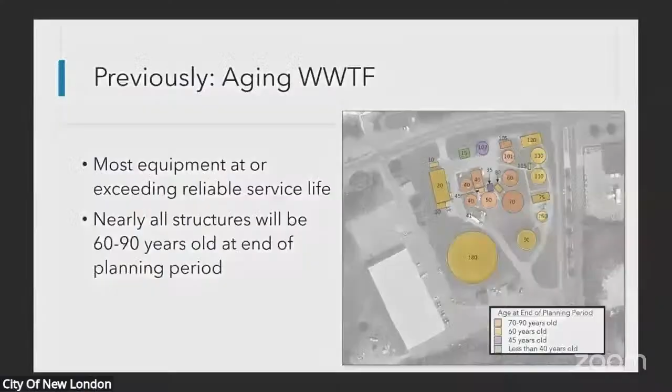Other thing that we've talked about before, first and foremost, was that phosphorus limit. But we also talked about the age of your facility. And some of you, quite a few of you, actually toured the facility and have been out there. I think Ben and Robert have been talking about the age of the facility even before this project started. But I think it's important to remind everybody that you have an aging facility. Much of the equipment there is at or exceeding or certainly fast approaching its reliable service life.

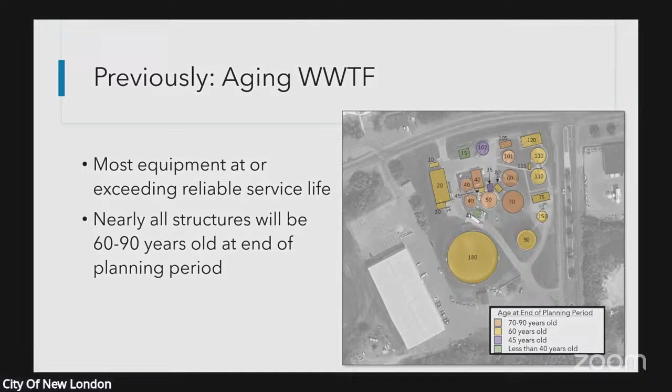And the plant's been there a while. The department, EPA, everybody, at a time like this makes you plan 20 years in the future. At that 20-year planning period, almost all those structures will be between 60 and 90 years old. So you have an aging facility. And then something else we've talked about before, you have one of the most complex facilities in the state.

What we're showing is a schematic of your plant. What is in blue is your liquid train. What's in brown is your solids train. In other words, when you clean the water, you generate solids, and those are processed by those brown unit processes on the bottom of the schematic. You can see there's a lot of circles and squares, and there's just a lot of unit processes here. There's a lot of complexity here. There's a lot of old complexity here.

And I think one of the things that's important to consider, we've talked about it before, is that this plant and the way it's configured, where you have a rock trickling filter, a plastic media trickling filter, and then activated sludge, you pump it 3 times. If we just dropped in another technology to meet the phosphorus limit, you'd have to pump it 4 times. But this type of treatment plant, where you've got those trickling filters in advance of activated sludge, is counterproductive to efficient phosphorus removal.

And someday you'll have a nitrogen limit. It's counterproductive to phosphorus and nitrogen removal because those trickling filters consume all the carbon, and the carbon is the fuel that drives your biological nutrient removal. So you have an aging facility, but a complex facility that's really configured for an era, a service area that probably isn't ever coming back.

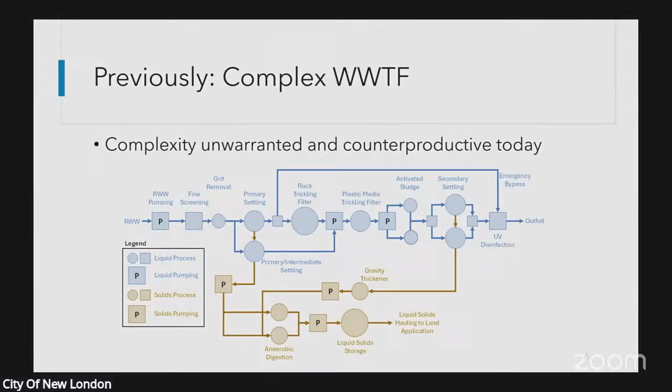I mentioned at the onset that there's some news to report about the MDV. There's really 2 practical compliance strategies to meet this phosphorus limit. And one is the MDV, a multi-discharger variance. At the previous meetings and when we did the previous study, there were rumors that the MDV was going to be extended, but it wasn't extended until more recently. So when we talked about the MDV before, it was set to expire in 2027. That's been extended, and I'll talk about that.

The way the MDV works is you essentially buy your way to compliance until the MDV expires. So you pay for each pound of phosphorus that you need, and you buy your way to compliance, and that buys you time. But MDV is a variance. That's a key word. Variances aren't forever. Variances are for a short, defined period of time. It was only an option until 2027 every time we've talked about this in the past. It's an option today for a longer period of time. We'll come back to that.

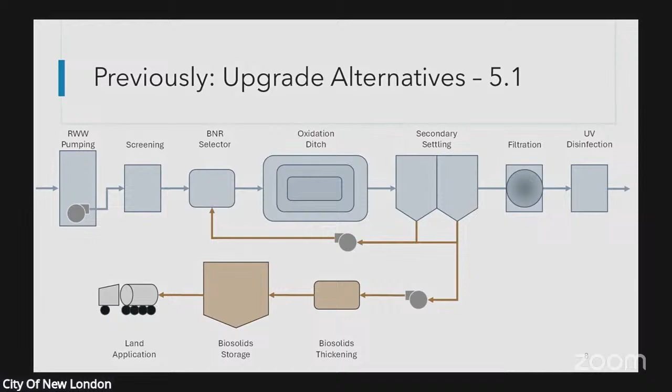The other alternative that we talked about is the same liquid train. All the blue boxes on the top are the same, but on the bottom, we would thicken the solids up, store them temporarily. Then we would squeeze the water out of those solids, put it in a heat dryer. So we would get those solids to like 90% and effectively produce, and I use this analogy, it wouldn't be exactly the same, but it'd be very, very similar to Milorganite. You can buy a bag of Milorganite at Home Depot or Menards or something. Some of us have put it on our lawns.

You'd make biosolids pellets that, at that point, after the drying process, are Class A material and they're effectively unregulated, and they could be distributed to local landowners. And so, because of all the logistical issues and the future of land application of Class B solids, we're seeing a huge proliferation in dryers. And there's quite a few in the state now.

The first one was Milwaukee, Wisconsin. They've been making Milorganite, drying their biosolids for many years. But since that time, Sheboygan, we designed Sheboygan. That was one of the first ones. Kiel, Wisconsin has a dryer. I'm going to forget some here. Wausau, La Crosse, Beloit, River Falls, Wisconsin, the Wisconsin Dells, Lake Delton area. Reedsburg is putting one in.

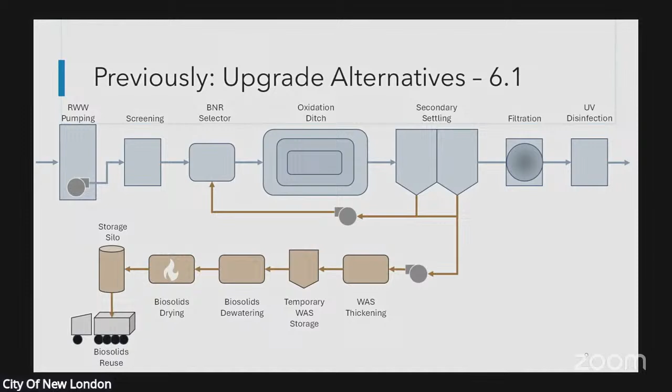material away, okay? And it's for all those reasons, all those upsides and the longevity of the land application program or biosolids program that the community said, let's at least run that out. Let's explore that further. We spent a lot of time, especially at the last meeting, talking about costs. So this is a slide that I presented previously.

In round numbers, 5.1 is a $50 million project. 6.1 is in the vicinity of $66 million, okay? But we presented a range, and we've got hundreds of decisions to make. Some of those decisions are going to kind of define where we are in that range. Okay, but we're going to talk about a big one tonight that has a pretty dramatic effect on those costs.

We talked about funding before. We looked at USDA Rural Development funding. We talked about Wisconsin Clean Water Fund, and we talked about just selling revenue bonds. After a lot of conversations with different people in different scenarios, the most favorable was a 30-year. The term of the loan would be 30 years through the Wisconsin Clean Water Fund. And as we sit here today, the interest rate on that would be 2.6%.

You will be eligible for principal forgiveness. So that's essentially a grant, free money of $2.1 million. Okay. If you do revenue bonds, you wouldn't get any grant money, or you certainly wouldn't get principal forgiveness grant money. And then USDA, we'll continue to monitor Rural Development, but when we talked to Rural Development last fall, they really weren't very bullish about having any grant money.

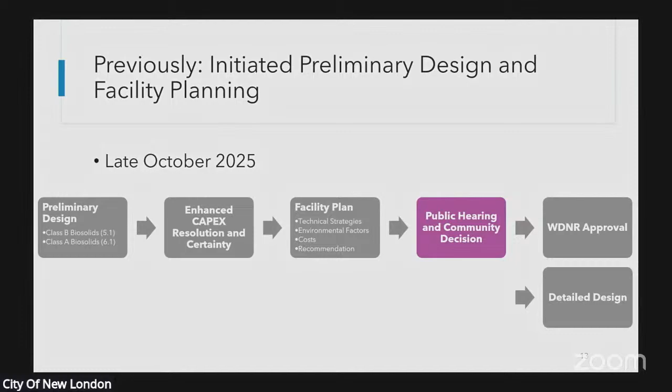Okay. Goes to the DNR, they approve it. In parallel with that, then you would be advancing with detailed design. And I just want to make a point that we've said at this meeting and previous meetings, tonight's not the night where you're making a final decision. That's coming. Any questions? So when you watch Netflix and you're streaming a show, they always give you the recap and then it sets you up for the show. Any questions on the recap?

Yes, sir. In the paper the other night, you're showing one for, I believe it's Appleton or Neenah-Menasha. And that's only going to cost roughly half of what ours is going to cost. Why is that? Isn't that a much bigger plant? I'm not sure. I don't know that particular project, but I suspect it's how their plant is configured. If it's Neenah-Menasha, it's a fairly new modern facility. So they were probably able to just plug something in there for what, $20–30 million at a facility that size.

If we look at Oshkosh, activated sludge, we're working on the Oshkosh facility. That's getting ready to go to bid probably next week. That's filtration and UV disinfection. That's 43 million. And that's a facility that, you know, they average about 10 MGD, so it's considerably bigger. So all that cost is not phosphorus. It's phosphorus plus addressing the age and complexity.

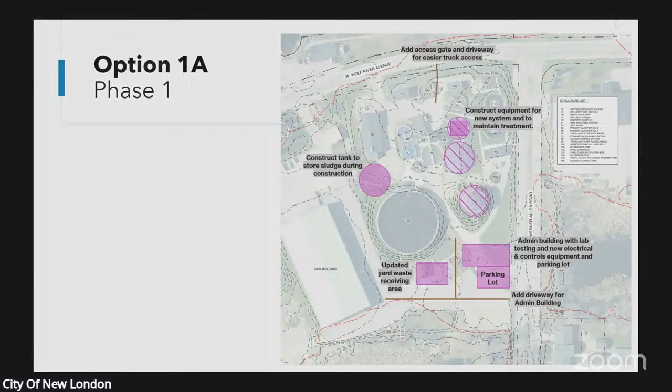And we would start demoing where you see cross hatching. Anywhere you see cross hatching, that's something that's being removed. And we would build part of our sludge storage there. We put in a chemical storage and feed facility there. So that's first year. Here's the next 2 years.

We would remove the existing administration building, and that's where we put our dryer or biosolids processes. We'd remove this big tank and put in some more biosolids processes. We put in our screening and grit removal. This is our oxidation ditch. This is that BNR selector. Here's a selector. We would build one new clarifier where your existing rock media filter is, and we would keep this filter operating for a period of time.

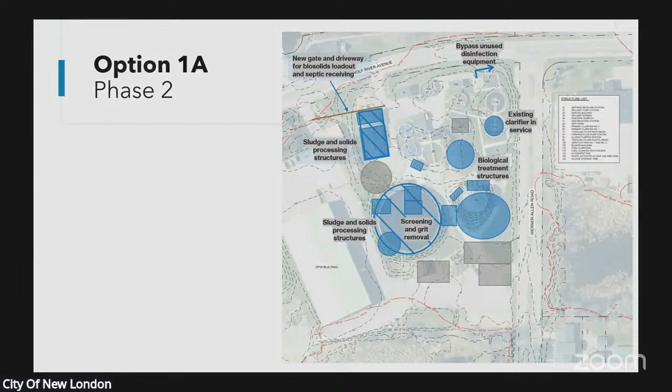And we would bypass or get ready to do some construction over here in the vicinity of your current disinfection system. This is years 2 and 3, at least. And then there's a third phase. So all this gray stuff now, these are new structures that are running. We would need to build another secondary clarifier here, demo that building.

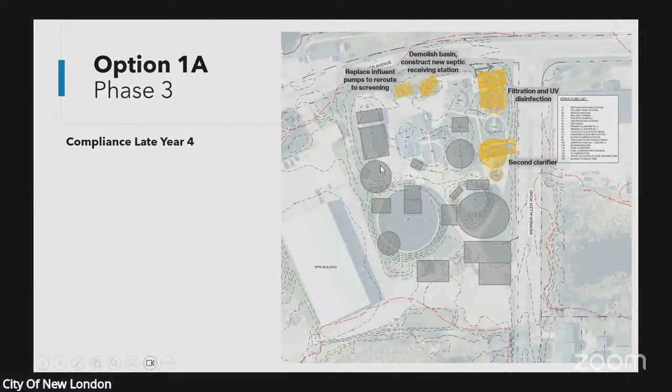And then we would build your filtration and UV disinfection up here because this clarifier is operating, and at some point this clarifier, we would put in new septage receiving here. This is year 4 and then some. And then finally, the final phase, we would be allowed to demolish the rest of the stuff that's not being used, okay? This probably bleeds into year 5, okay? It's a very long construction.

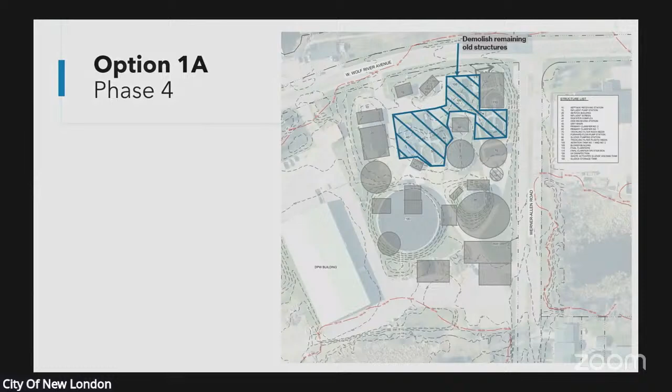So for a long time, for years, your facility is operating with less than an ideal configuration, okay? You're operating with parts and pieces. These guys have to find a way to make some of the old stuff work and the new stuff. The contractor is ultimately responsible for getting flows moved around the facility while he's doing construction. You'd have some temporary piping, pumping, electrical, and controls. You have to run electrical and controls out to existing stuff that's going to stay, and you have to power your new stuff.

There's a very long construction duration, elevated risk for disruptions and unforeseen conditions, things that really nobody could plan for that he's going to run into when he starts construction. And then finally, all of that speaks to the challenges of building this thing. Challenges means risk, means cost. But there's even the fact that a bidder is going to look at this and all that's involved. And there are some bidders that are going to say, there's some other nice projects out there. I'm really not that interested in bidding on this work. So just the fact that it's that complex, you could lose some bidders, okay?

All those bullet items are things that would add cost to the bid because a contractor has no choice. If this project is running out 4 or 5 years, he's got to hedge against what costs are going to look like, what his labor costs and some of those material costs are going to look like. All that's gonna factor into the bids. But option two, so if we build west of where the sledding hill is, west of the Public Works building, here's phase one.

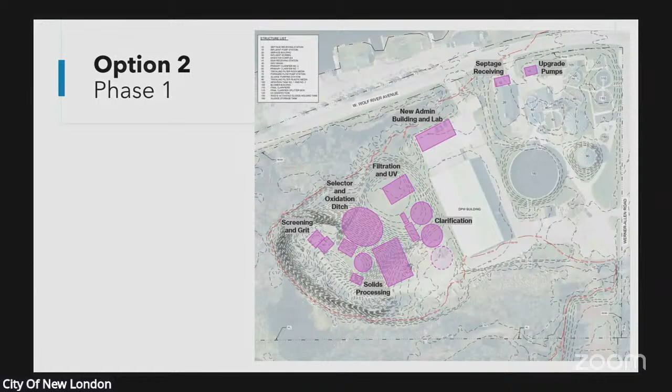But in effect, the contractor just comes in, builds the pink stuff, gets it up and running, and then the demolition could start. And I've worked on one other project similar to this, where they built a new facility, and then they came back and they demoed the existing one. It's entirely possible, and it might even be advantageous to bid that demolition of the existing plant and the conversion to some other beneficial use, like a yard waste facility, as a separate project and maybe get more accurate pricing at that point. And maybe even get a different contractor. You would open it up to different contractors. That's the way we handled it on one project that I worked on.

But you can see there's just a very stark difference between these two projects. One with a lot of sequencing, one that's very straightforward. So it avoids, remember, all those bullet items. All those bullet items are things that bidders and contractors don't like to see and would certainly put in their bids. This really avoids all of that. So it streamlines construction.

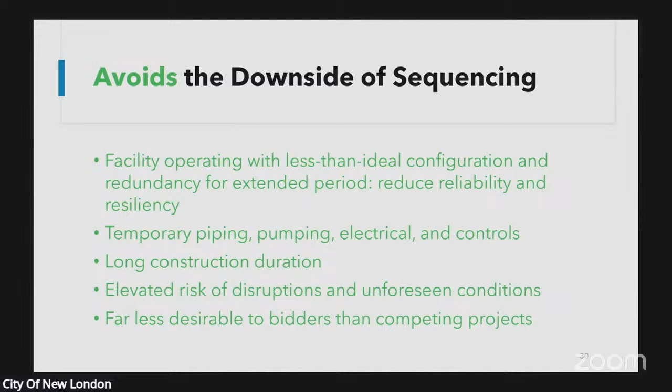So option 1A, the one that we looked at, or a whole host of others, you're looking at 4 phases. Best case scenario, 3 long phases. You're looking at compliance late in year 4. If you remember how we went through all those different things, the last thing that was built is the thing that's going to get you in compliance with that phosphorus limit. The last thing would be that filter, and that's in late year 4. So timeline, at least 4 years.

From any contractor's perspective, that's kind of a risky project with that much sequencing. So that means that for that amount of work, the cost is going to be high. You'll pay a premium for that. That should say option 2 on the adjacent site. 2 phases, 1 phase for the facility, and it's pretty typical risk, and costs are more in line with the going rate for a new treatment facility.

So, we did talk to a contractor, and we looked at these 2 alternatives. Let's call the drier option $60 million in construction for tonight. Okay, round numbers, $60 million. We looked at the situation. Are we going to add 10%? He said, easy. You're going to pay easily 5, 6, maybe more million dollars, depending on all the different decisions, to build on the existing site.

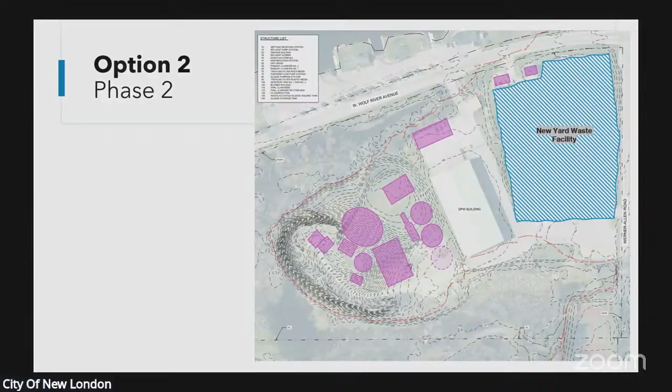I have to agree with Dave that I think that 5, 6 million ain't gonna cover much. It's gonna be more. I can't disagree with that. The longevity of the project, making sure everything goes in correct order, we don't get no backups, we have no other unforeseen problems. I think it makes a lot of sense.

What contractor's not gonna add money? With the price of inflation right now, on year 4, say year 3, what contractor isn't gonna add a couple million dollars just to cover his own butt in case prices go up? I mean, you know they're gonna go up, but you can't guess at what they're gonna go up at this time. So he's gonna add to it, but he would be dumb not to.

And I guess my concern has been, we've been having problems with the digester and how long that has been taking to try to get things taken care of there. And now we're hearing that the second one is starting to go. We don't have the time to really push this out any further. The equipment is failing, has failed, is failing, and we're spending money to fix equipment that we're gonna tear down. So the sooner we get this done, the better it's gonna be for everybody.

And like Dave said, we can move that dirt somewhere else and make a new ski hill somewhere else for far less. We have property north of town that's recreational. Yeah, we've got the spaces for that. When they start moving the dirt, just drive it across town, drop it off over there, and make a new hill. Exactly. And start developing recreational for that part of the city. Everything's on this side, and it's been discussed that the community doesn't have nothing recreational on the north side of town.